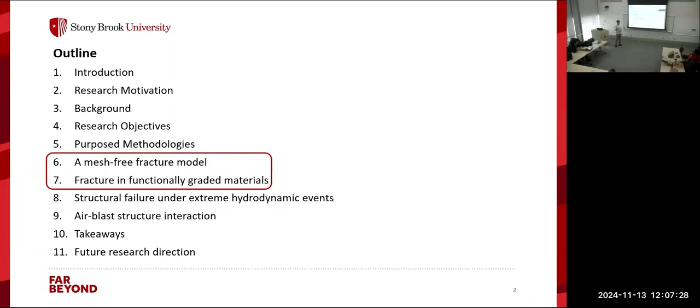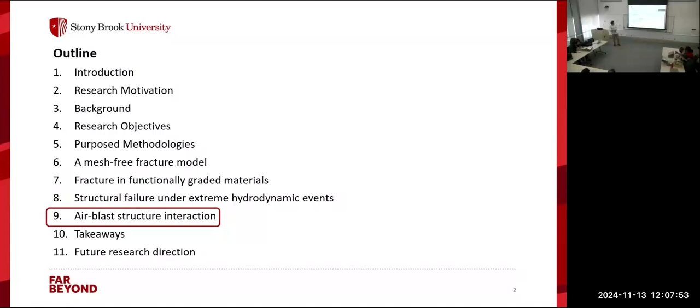And then I will present some simple applications of our methodologies in terms of fracture and simple linear elastic material, and then in the more complex case of functionally graded materials. And then I will talk about the main topic of my research, which is modeling failure of structures under extreme hydrodynamic events. I will also present some results regarding failure in structures that are subjected to explosions or explosion-induced air blast. And then at the end, I will give you some takeaways of the talk, and I will talk about where we are right now and what is the future for us.

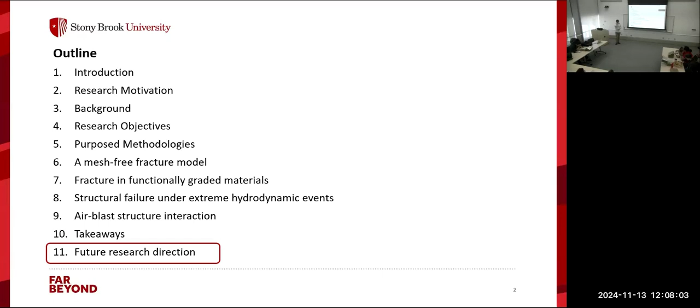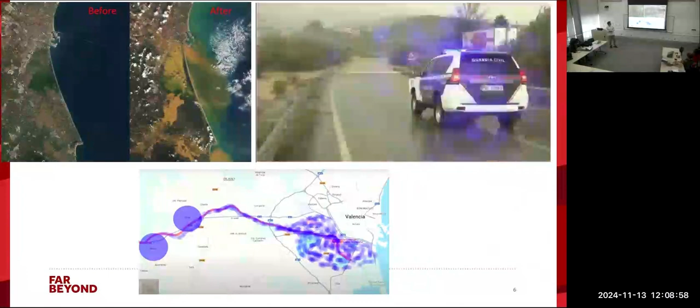So when we think of water or oceans in general, we always think about good things, beautiful things that are calming, like seas, beaches, and all the beautiful animals. But that's not all about oceans, right? As impossible as it may sound, ocean or water in general has become one of the biggest and very dangerous sources of life-threatening disasters in our life. To give you a very simple hint, these are the things that just happened last year. You see all the dates are pretty new, and if you follow the news, the most recent one is the flood in Valencia, Spain. So this is a before-after picture from satellite.

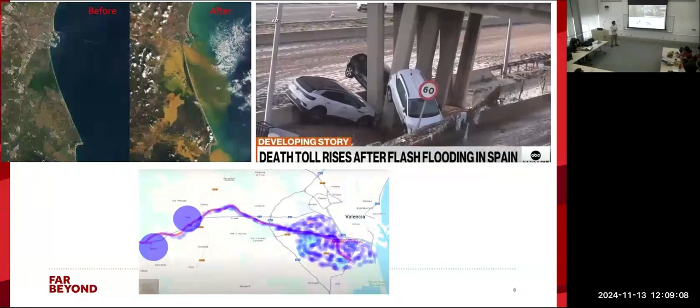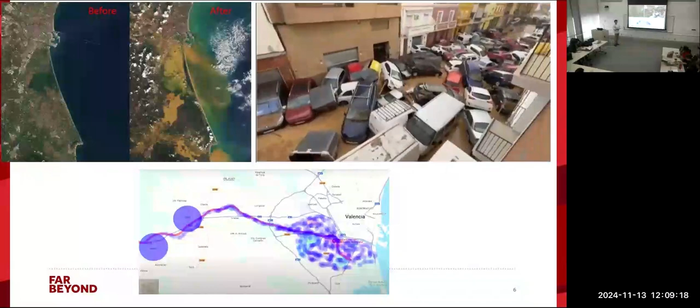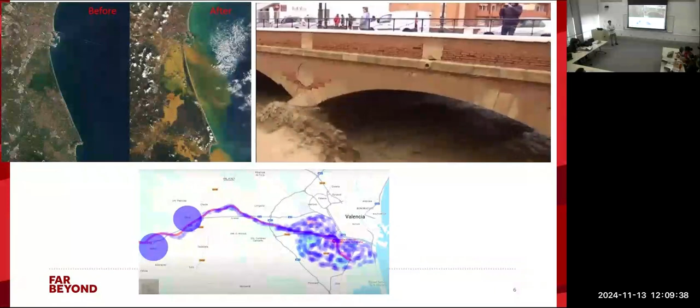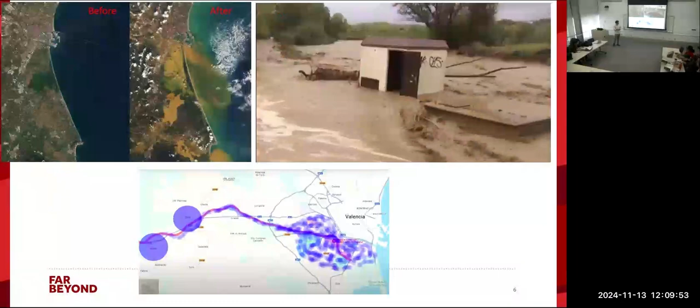And what happened in Valencia is there is a region called Chiva, which got a huge amount of rain. Think of it like this: normally, the amount of rain that is supposed to drop on Chiva in 1 year dropped in 8 hours. There is a dry river that drains this rain to the sea, but since the amount of rain was too much, it overflowed and flooded the entire city. But luckily, there is another river that cuts off the flood towards Valencia's downtown, which would have been a bigger disaster. So just to give you an example of what we are looking at, these disasters are very dangerous and life-threatening.

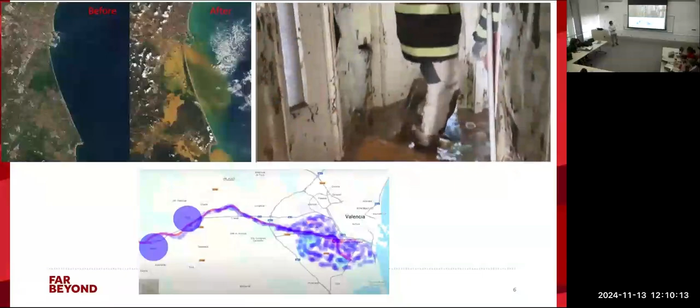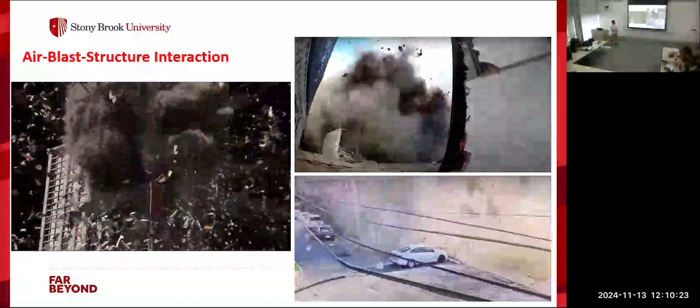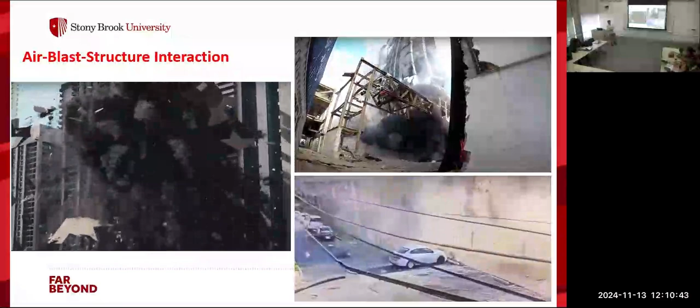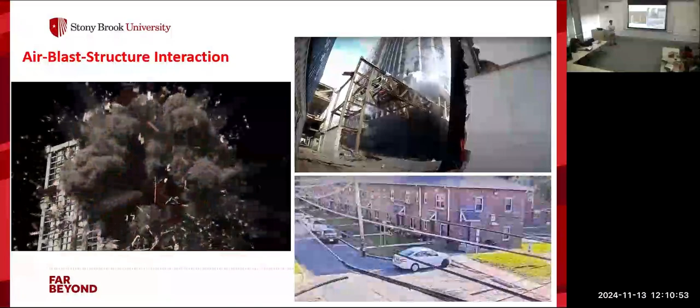So this is one type of fluid structure interaction where the water interacts with the structure. There is another type that behaves similarly, computationally they are very similar, but now instead of water, we have air as the fluid. This is what we call air blast structure interaction, which can be generated from anything. It can be a human error, a controlled explosion from a civil engineering perspective, or in the more extreme case, terrorism activity. So these are events that possess lots of complex physics that threaten life and the economy.

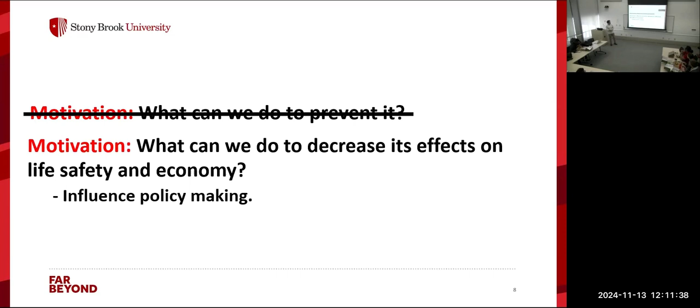All this danger brings us to our motivation. So what can we do to prevent these events? Since these events are a direct outcome of global warming, and we all know that we are at a point that we cannot prevent global warming anymore, what George and I did was rephrase our motivation to: what can we do to at least decrease its effect on human or animal life and the economy? From an engineering perspective, we can influence policy making, we can design more resilient structures, or we can develop early warning systems and efficient evacuation plans. And if you are from a computational background, one way is by computationally modeling and simulating future events and trying to act accordingly.

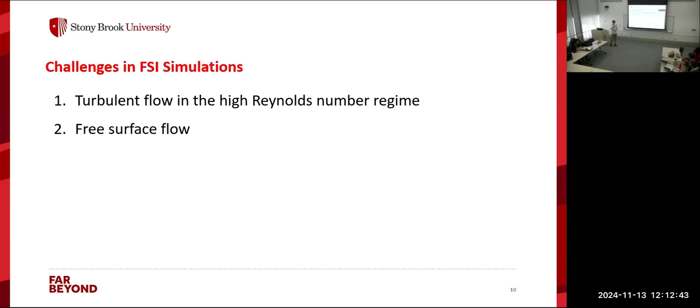Of course, there are some challenges in simulating these events. One of the big challenges is that the flow, either water or air, is highly turbulent with a very big Reynolds number, which requires any computational model to take into account the turbulent nature of the flow and hence to have a turbulence model. These flows also have lots of free surfaces that we need to manage carefully. And more importantly, as you saw in the videos, when the fluid hits the structure, it undergoes large deformation that often causes material separation, fracture, or fragmentation that needs to be handled carefully.

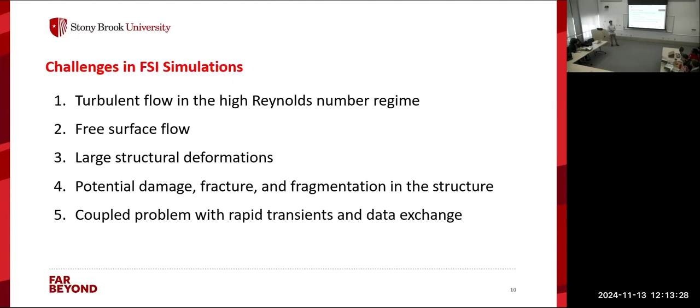And from a more numerical point of view, there are lots of physics involved in these systems. So the coupling, we have two different phases, fluid and structure, but lots of physics interchanging between these two phases. So we would want to have a method that handles this data transfer and rapid dynamics very carefully and very efficiently.

Of course, there are many people trying to model these types of events. One category is CFD methods, computational fluid dynamics, which are mostly focused on the fluid part of this system, where they try to model the fluid and see what's going on there, but they do not usually take into account the structural response of the system.

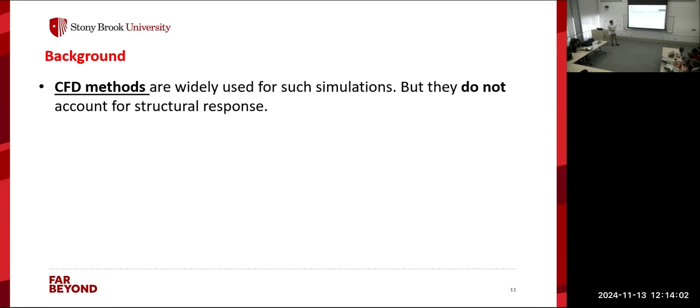To take the structural response of this system, there are other people who use mesh-based FSI approaches, like finite element, finite volume, and finite difference, where they also take the structural response of these systems and see how the structure deforms. But I want to draw attention that these structures undergo large deformations and they fail. So if you're using a mesh-based method, the mesh can undergo mesh entanglement, distortion, or material separation that most of the mesh-based approaches cannot address.

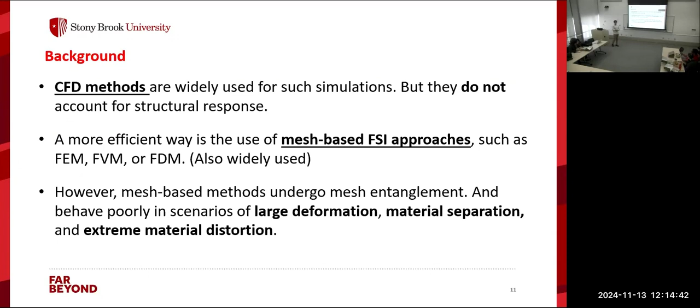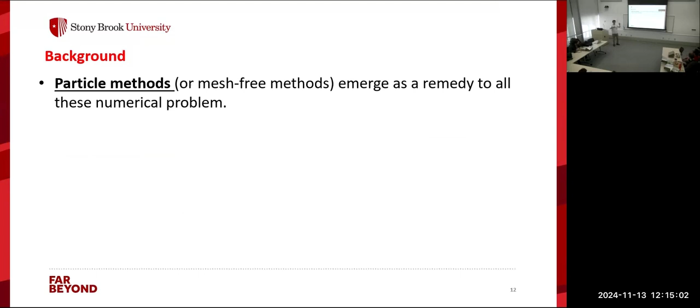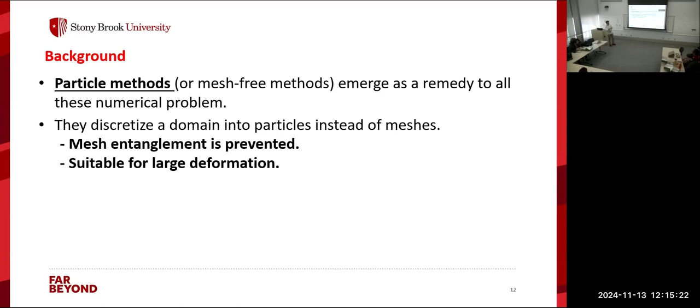There's a more interesting category of methods that people are using, which is particle methods. From its name, particle methods do not rely on meshes. Instead, they rely on particles. So basically, they discretize the domain into small points or particles, and then they solve the equations on those particles instead of a mesh. So one of the main advantages of these methods is that since they do not have a mesh, we will not see any mesh entanglement. And they are very ideal to address large deformations in the structure. And it becomes way easier to handle material distortion, separation, or failure and fragmentation.

So one of the very famous particle methods that you may have heard of is smoothed particle hydrodynamics, which is one of the very oldest, and it has been applied to many different scenarios in many different physics. It's truly mesh-free, and it has been successfully applied in various industries, from aerospace to astronomy. But one thing that SPH lacks right now is that it cannot solve for fracture and fragmentation.

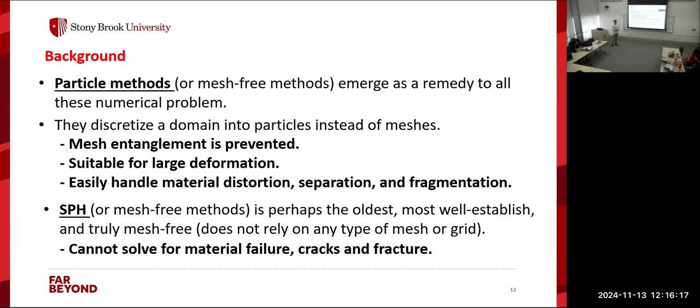So this brings us to our overall research objective. We eventually want to develop a model that is capable of predicting extreme hydrodynamic events and the material failure in them, and also another model that can predict the behavior of air blast structure interaction. But to do this, we have divided our main objectives into smaller subsets. Since SPH is not capable of modeling fracture, first we wanted to develop a comprehensive fracture model for SPH.

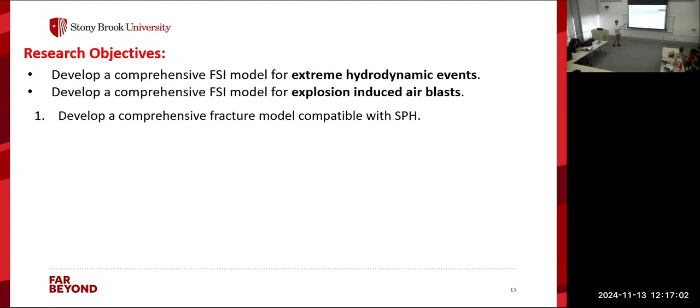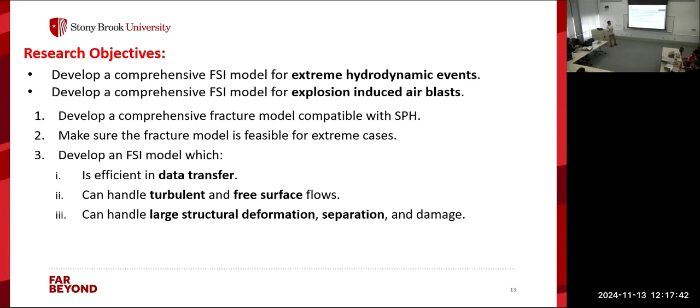But that's not enough, right? These scenarios are very extreme and very violent in nature. So after developing the fracture model, we would also want to make sure that it is able to predict the structural response within extreme conditions. So this was our second objective, to test our model in that condition. And then we arrived at one of the main objectives, which is to develop an FSI model which is capable of efficient data transfer, of modeling the turbulence in the flow and the free surfaces, but most importantly, capable of handling large structural deformation, fragmentation, and failure.

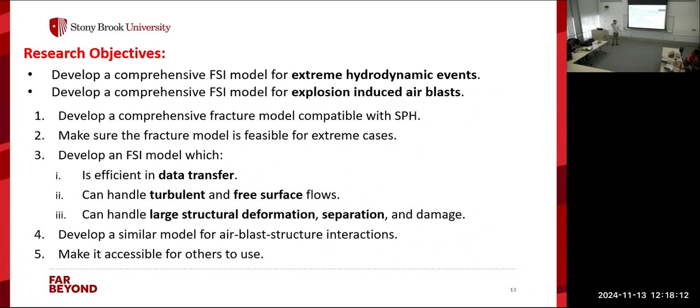And one before the last objective is to develop a model that is also able to predict the failure of structures in air blast. And the last one, which is not the main objective, but it is good to have, is to make all these codes available for people to use in their work. So these are the main research objectives that we have.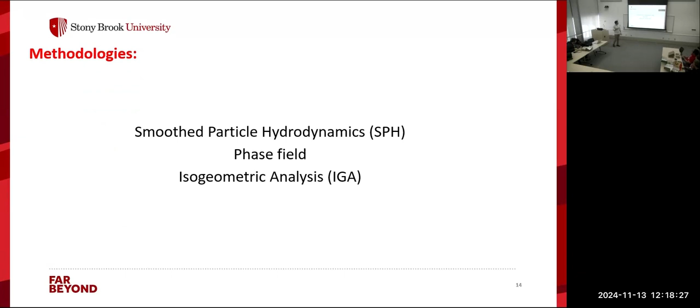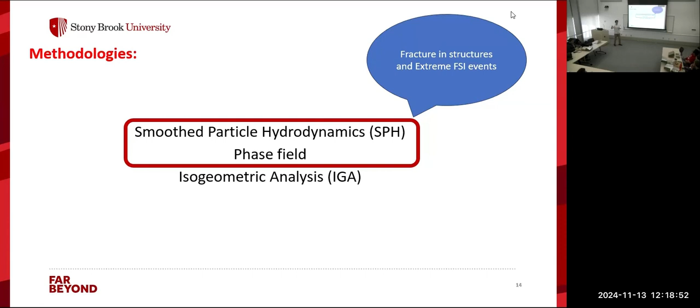For all these objectives, I'm going to use three main computational methods: smoothed particle hydrodynamics, or SPH for short, phase field, and isogeometric analysis. I will use the first two to model fracturing structures, and then to model extreme fluid structure interaction that is also capable of modeling fracture. All three to model the structural failure and air blast structure interaction scenarios.

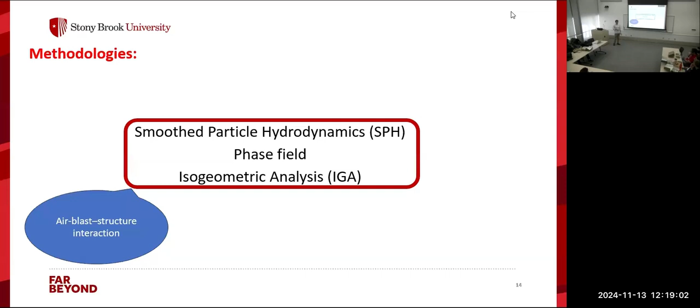But to give you a very simple overview, SPH is basically a particle method that discretizes a physical domain into small particles. And each particle has its own support domain, other particles that support the particle in terms of information, which is also called the kernel support. And if you want to, for example, evaluate the value of a function on a specific particle or position in the domain, you basically use kernel summation over the neighboring particles or the support domain.

And if you want to evaluate the derivative of the function, you still do a kernel summation over the neighborhood. Instead of applying the derivative over the function itself, you apply it over the kernel function, which can be a very well-established mathematical function. So this is the general idea of SPH.

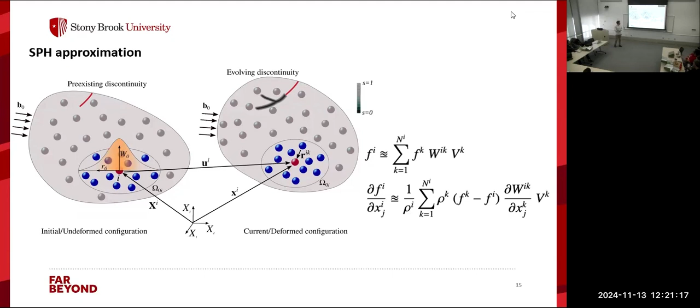It is kind of easy, but computationally it's very expensive and hard, because now you have to explicitly track the surface or interface in every step of your simulation. So instead, since this is very computationally heavy and costly, we suggest another method, which is named phase field. Instead of tracking the discontinuity itself, phase field numerically changes the discontinuity surface into a field variable, which in our case we call S.

So if you have a discontinuity, you don't track the surface. Instead, you have a field variable that determines where the surface is. Now, in the case of fracture, this discontinuity is represented through this, which is based on Griffith's theory of brittle fracture, a very well-established theory. And in our case, we use a special type of phase field that is compatible with SPH and particle methods in general, and also with explicit time integration.

So in general, if you want to solve a domain for its deformation and fracture, you have to solve these two equations. The first one is for the momentum balance, and the second one is for the diffusion of the phase field variable. Just a simple note that in this method, you don't have to track the discontinuity surface. You don't have to give any input on how the fracture happened, when it happened, or when it branches into many. So it's a very convenient method, especially in numerical applications.

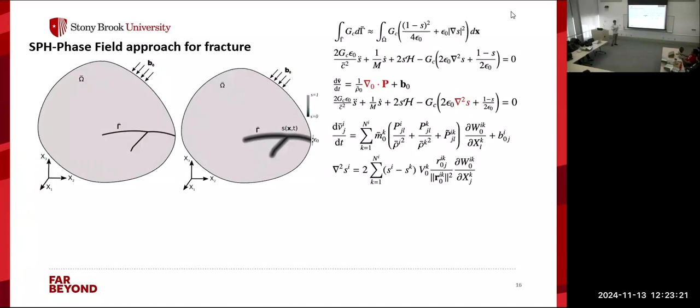Now, from the SPH side, these two equations can be represented as follows, where you have a summation over the neighborhood. Here, this P is the first Piola stress for the structure, which can be evaluated through any constitutive model. In our case, we use Neo-Hookean. And this is what you have to do to get the fracture evolution within a simple structure.

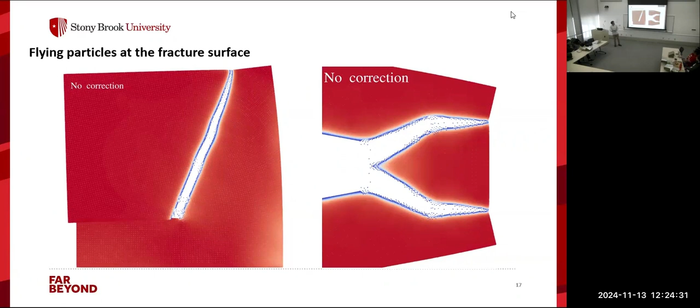So we needed to solve this. It doesn't change the physics, but it's a problem for us. So we came up with a simple correction that we name omega correction, where you apply it and the dust particles are now stuck at the surface and you don't have any flying particles around, which is convenient. So this was our fracture model.

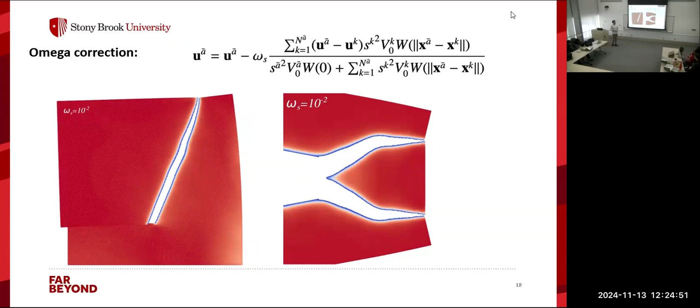We wanted to see if this fracture model is good enough to solve any fracture. Here, what you see is a very simple tensile case where the material is pulled from two sides and there is a pre-existing crack. Then it evolves into this and branches into two. This is a very common benchmark that people use in fracture mechanics, and as you see, the results are in quite good agreement with the literature.

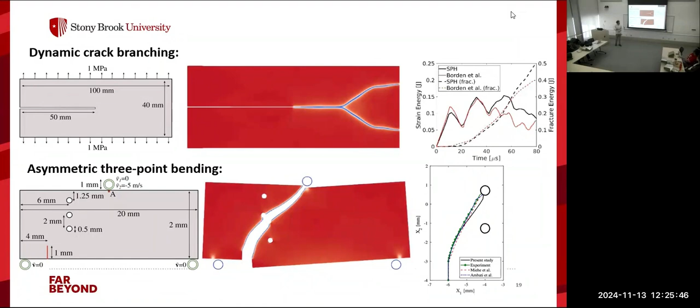Also, there is this one, which is also kind of common, but with more complex geometry. Here we have random holes placed in the domain, and we have a pre-existing crack. When you apply a 3-point bending force, it cracks like this. And this is the comparison between experiments and other numerical methods, and you see how good the fracture surface is.

Then we moved on to apply it to more complex cases. Here are some others that still have good agreement with literature. And you see this one is an experiment, and we were able to capture very fine details of the experiment.

So far we have a fracture model that can handle the fracture in simple isotropic linear elastic materials, but we are still unsure if it can handle scenarios with very extreme conditions.

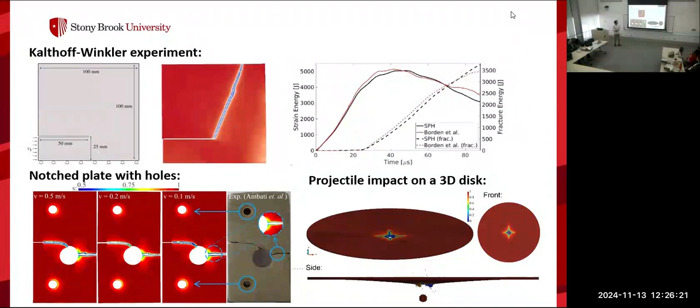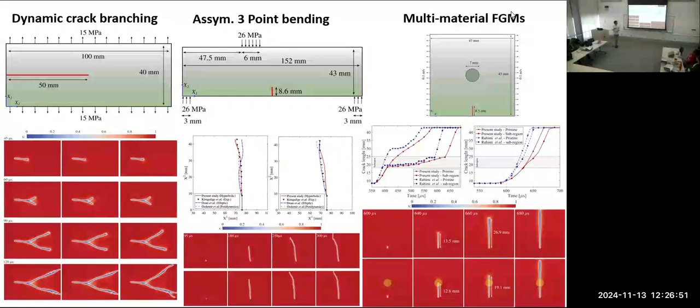To test that, we applied it to a different material, which is called functionally graded materials. Functionally graded materials are an advanced type of composite materials that are usually used in aerospace and marine engineering. They have very convenient material properties. We tested our method on those, and as you see, the results are in good agreement with what people in literature have seen.

So far, what we did is we developed a comprehensive fracture model, and we tested it on extreme conditions. Our next objective is to develop an FSI model that is capable of all these: turbulence, efficient data transfer, free surface, and damage in structure.

Of course, when it comes to fluid-structure interaction, things get a little bit more complicated. Now, on top of having a good structural model, we also should make sure that we have a good and efficient fluid model. And more importantly, we need to make sure that our numerical interaction between fluid and structure is very efficient and very accurate so that we don't lose any physics there.

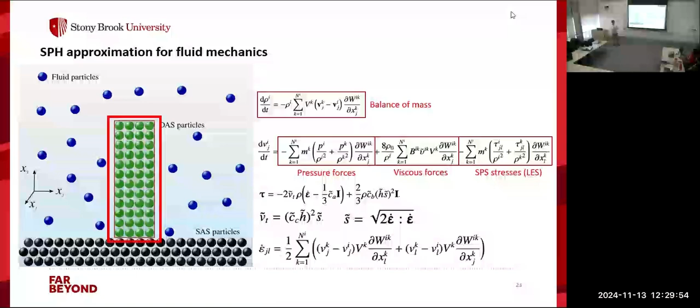So instead of coupling the physics of the two phases, what we did was we coupled the geometry of the two phases. By geometry I mean we simply have a domain which has fluid and a structure object. We cloned this geometry and solved all the structural equations on top of the cloned geometry, and then we established a mapping method based on the Lagrangian polynomials to exchange pressure from the main geometry to the cloned one, and back to exchange the position and velocity from the cloned one to the main geometry.

Since the geometries are different, you can use any particle resolution and any method on this cloned geometry, and you just have to map back the velocity and positions. This gives you the chance to increase the accuracy of the structures without causing any computational cost on the main fluid solver.

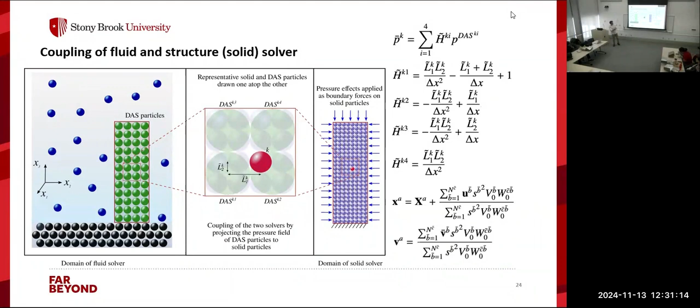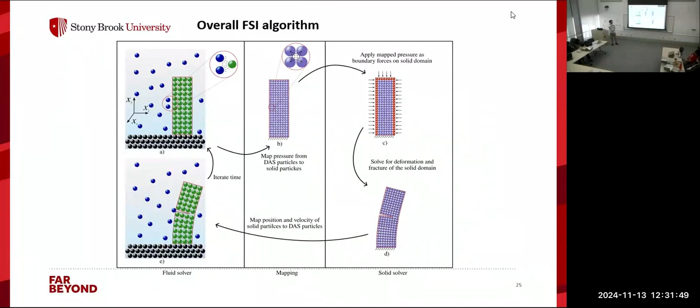So to give you an overall idea of what our algorithm looks like, we solve for the fluid domain. We map the fluid's pressure on the clone geometry. We solve for the clone geometry in terms of fracture, deformation, or any other physics that you want. You could also solve temperature without even getting involved within the fluid solver. Then you map back the field variables to the main geometry, and you continue in time.

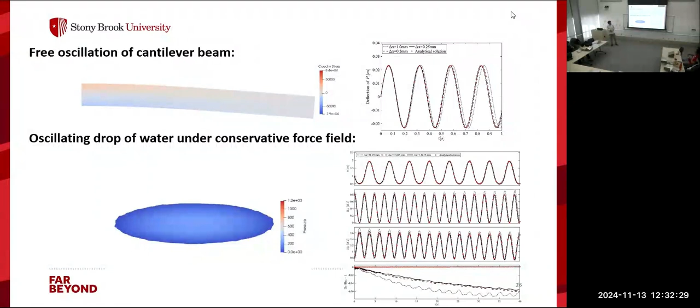We first applied our method on simple structures. This is a free oscillating beam under a simple initial velocity; we are tracking the tip displacement, and you see how it is in good agreement with the analytical solution. And here is a drop oscillating under a conservative force, and you see how the predicted results are in good agreement with analytical ones. After this, we moved on to apply our method to a more complex case.

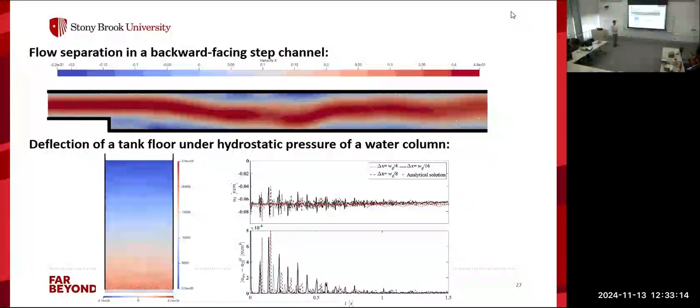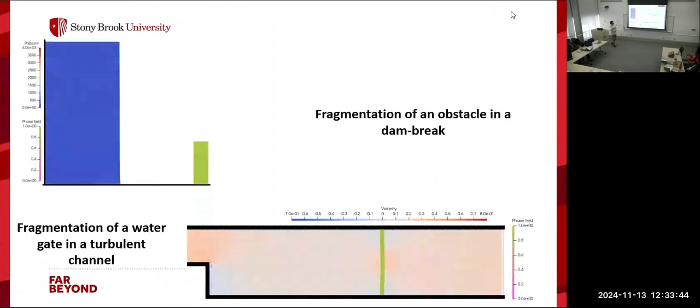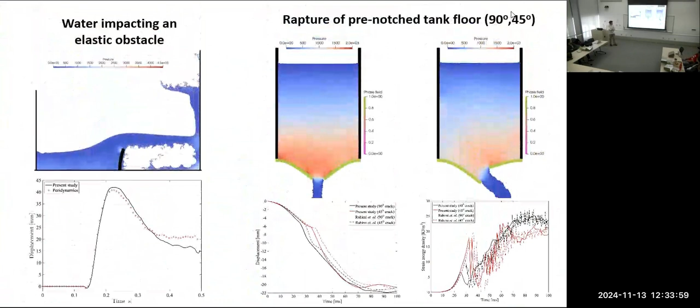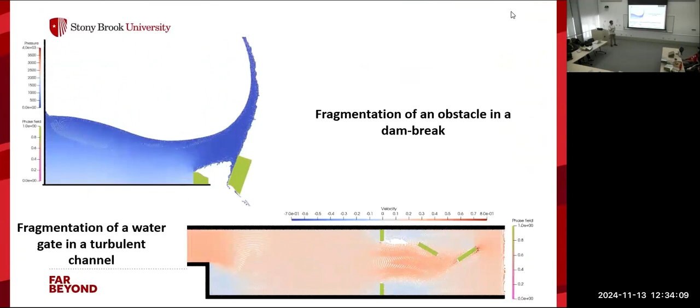After this, we applied our model to more complex cases. Here you see that a dam breaks and hits a structure in its path, and the structure breaks down and falls apart. And here you see a water channel where the water flows and breaks the gate. So these are complicated cases.

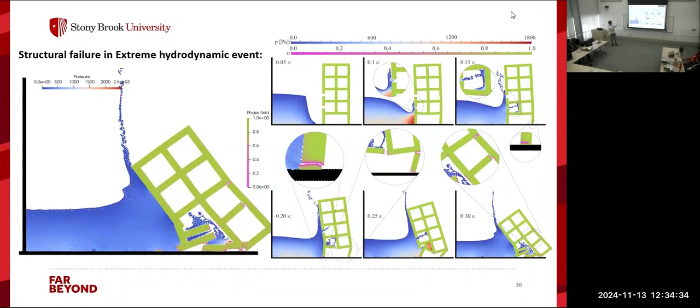Now, so far, we had already done this. Now we have a model that is capable of good data transfer, turbulence modeling, and large structural deformation modeling. And now we move on to developing a model for explosion-induced air blast on structures.

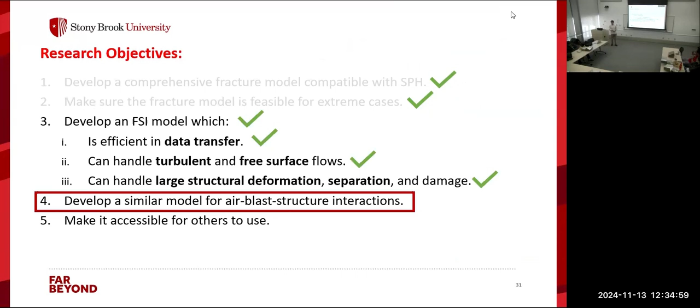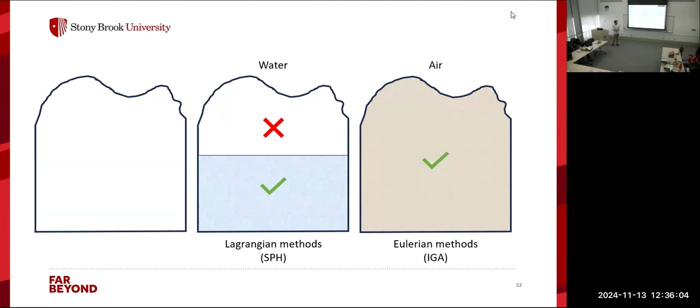In case of air, the container is always full of air, no matter what you do. So it is convenient to use Lagrangian methods for modeling water, and Eulerian methods for modeling air. Now, for our air section, we chose isogeometric analysis to model the air. There are many reasons for that. One is that isogeometric analysis, or IGA, is highly accurate and also models the geometry very perfectly.

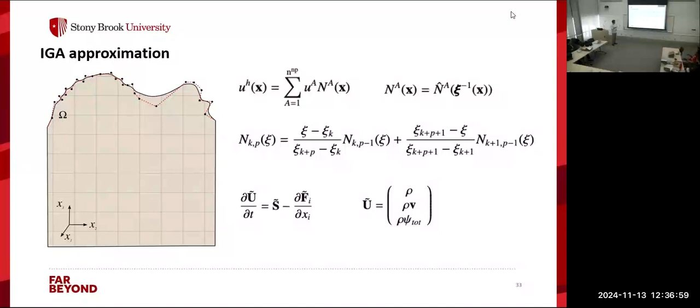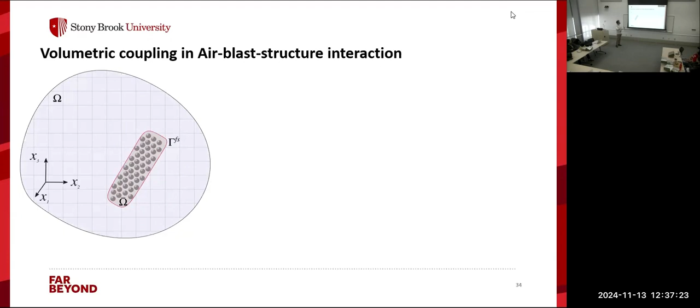Now, when it comes to a structure inside an air container, things get complicated. In the Eulerian method, traditionally, we are supposed to explicitly track this interface between the structure and the fluid region, and then solve for it. However, tracking any type of discontinuity is very hard and very computationally costly.

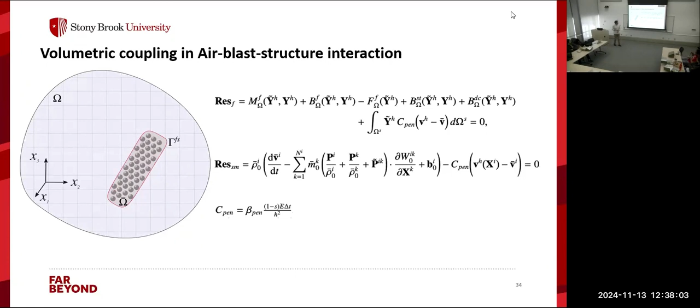So instead, we made use of another method, which is called volumetric coupling. In volumetric coupling, instead of tracking the interface surface of the two phases, we just penalize the velocity of each phase relative to each other and include it as an extra term in the governing equations. So that was our numerical method, and these are some examples.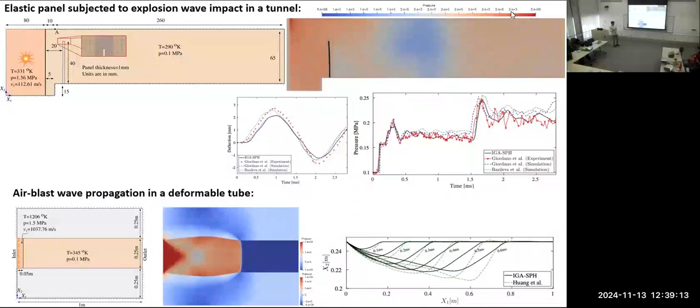These are some extra cases. Now there is an explosion happening inside a chamber, and there is an elastic object that is subjected to the explosion wave, and then the elastic object undergoes horizontal translation as well as plastic deformation at the tips. And this is the comparison of our predictions with literature, and they are in a very good shape.

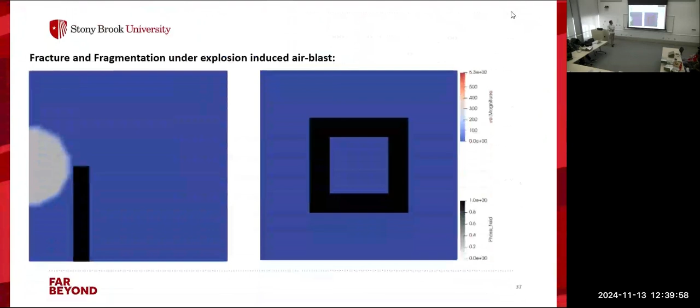And these are the pressure values at different parts of the chamber. And as you see, the pressure values are also in good agreement with what other people have reported. Now, those were for normal structural deformation and plastic deformation and translation. Here, we have a brittle panel, a brittle chamber that is subjected to internal explosion.

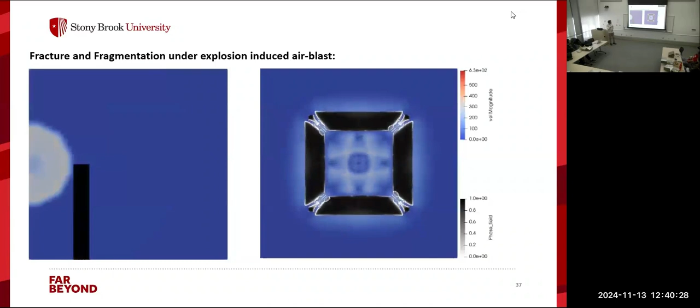And then this explosion kind of breaks apart the chamber and it makes it travel in many directions into many pieces. And this is where the explosion kind of breaks down a structure within the chamber. So far, we have already done all our objectives.

But one thing that I didn't mention here was for all the simulations that you saw, I simply assumed that the material that we are using is either metal or simple elastic isotropic material, which is not the case in physical life. There are very complicated materials like concrete, for example. If you have a building subjected to explosion or to a water impact, then we need to have a model to accurately predict the

behavior of concrete. Now, we haven't done that so far, but one of our future objectives is to make sure we are accounting for the response of concrete. And the way we would do it is by using a microplane model, which is one of the models that highly accurately predicts concrete behavior. And our last objective, but not least, in the future, we would want to make these codes and algorithms open source so other people can use them in their research.

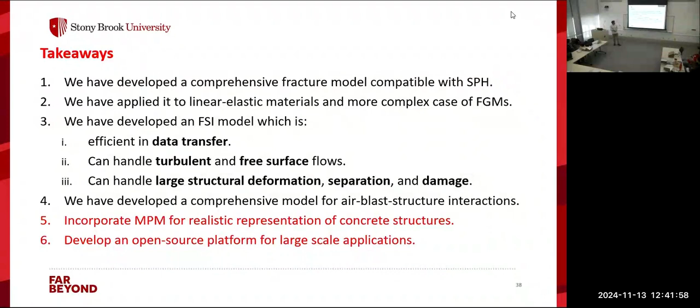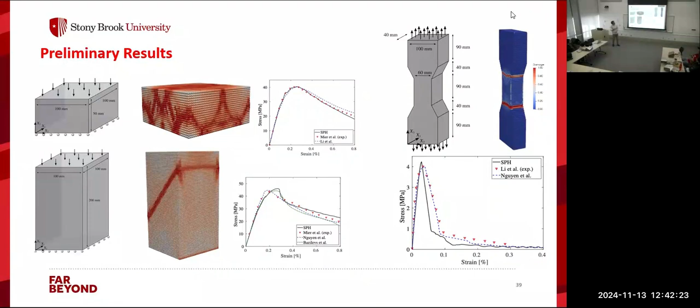So these are some preliminary results that we have for the concrete modeling. Here we have a short concrete block subjected to compression, and here we have a long one, and here is a dog bone specimen that is under tensile loads, and you see how the predicted results by SPH are similar to the ones that the experiments have reported.

So these were what we did, and this was at the beginning of May when I prepared a timetable. Now we are here, and I was still not done with the first task, which is to develop the microplane model based on GPU accelerated code. But I'm hoping to finish it soon so that George graduates me. And then we would also want to make all these codes open source for others.

And then once it's open source and efficient, we would want to apply it to large scale simulations and try to report the findings. I'm not going to do the experimental one because I'm not good at it. So my groupmate, she might do it later.

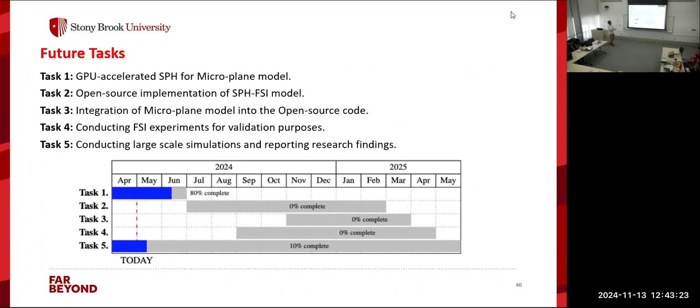Any questions? Thank you for the good talk. I have a question about the efficiency of this method that you introduced. So in comparison with CFD and the FSI that we do with CFD, how efficient is that for large scale problems like flow in rivers? Because you need to solve the equation for all the particles, maybe at turbulence.

Well, the difference between computational fluid dynamics and computational mechanics is that for fluid dynamics, we are looking at the big picture. We are just trying to see how the fluid is moving and the structure surrounding it. So we are not going into details of the flow, like, for example, trying to measure the mechanics of a point of fluid inside the flow, or trying to see if the structure is moving, or if it moves, would it fracture, and what type of stresses you will see within the flow and within the structure.

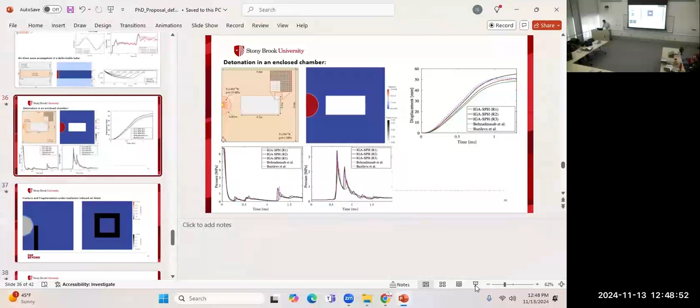So what we used here was a simple strain hardening material. It was very simple: we have a linear region and then a hardening region, which is also linear. We didn't really apply complicated material models, but they can be applicable, since my focus was more on development of the method rather than the constitutive model itself. Yeah, this one, right? So this is just a simple linear elastic plastic material that is strain hardening. I didn't go into very detailed modeling of plasticity because it was not my expertise area. But it depends on the constitutive model. If you use a good constitutive model, you will have that material here as well.

And I have a following question: what is the application? If you get the result of the simulation, what's the benefit? Like you said in the motivation, you want to reduce the cost to human lives and the economy. So if you got the simulation result, but the disaster already happened, what's the benefit of the simulation?

So these are actually made-up scenarios of what happens if this thing happens, right? For example, I don't work on the disaster part, but if you have 100 years of old disaster data, you can predict that in the next 100 years this will happen. You make that scenario within your computational domain and try to predict the structural response. For example, if you are building a hospital and you want it to last for 200 years, maybe for the next 50 years you don't get much disastrous or flood effects, but there's one chance a scenario will hit the hospital, and you would want to simulate that and predict its behavior.